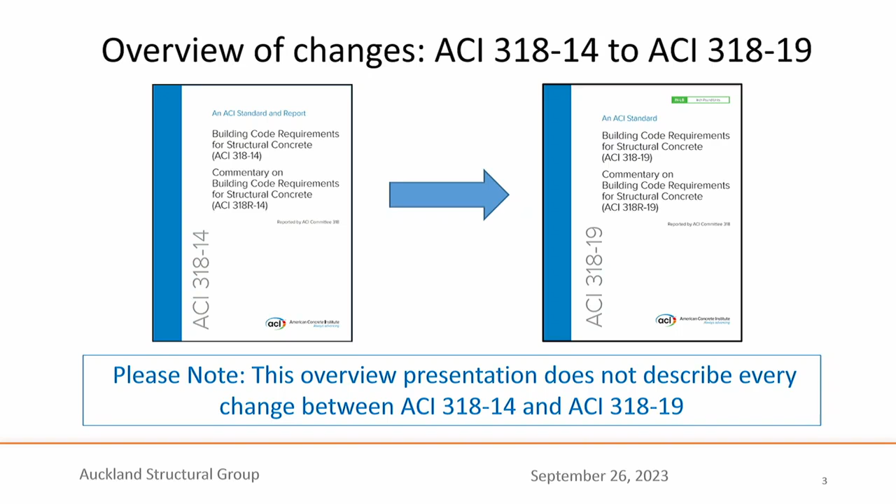Just a warning, if you are familiar with the 2014 edition, this presentation is not a complete introduction to all of the changes in the 2019 edition. I have to sort of put that disclaimer there.

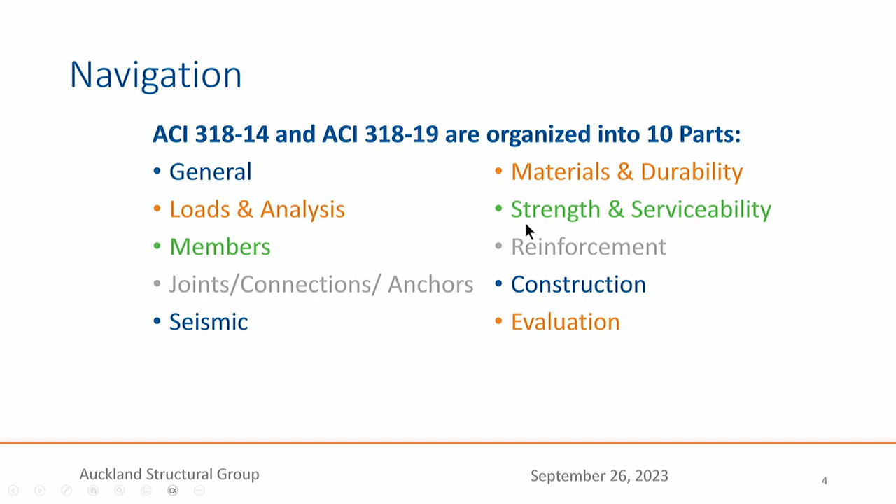With regard to the code in general, it is organized, currently since 2014, into 10 parts as shown here. I won't go through all of them, but you'll be particularly interested perhaps in the seismic part down here in the lower left. I will be talking about some key changes and trends in most of these sections as we go through.

All right, first, existing structures. Very often we have to evaluate existing structures for their strength, their capacity, and sometimes for seismic capabilities or seismic resistance.

This code is for new design, but there is a provision that says if you want to use this code to design elements as part of a retrofit, it's perfectly valid and is permitted. The commentary to that statement points the reader to another document, actually another building code called ACI 562, which is the official code for evaluation and repair of existing buildings. I just want to caution that is not seismic evaluation and upgrading of existing buildings. It's all things non-seismic, although it does point to some other places for seismic. So this is how we deal with existing buildings.

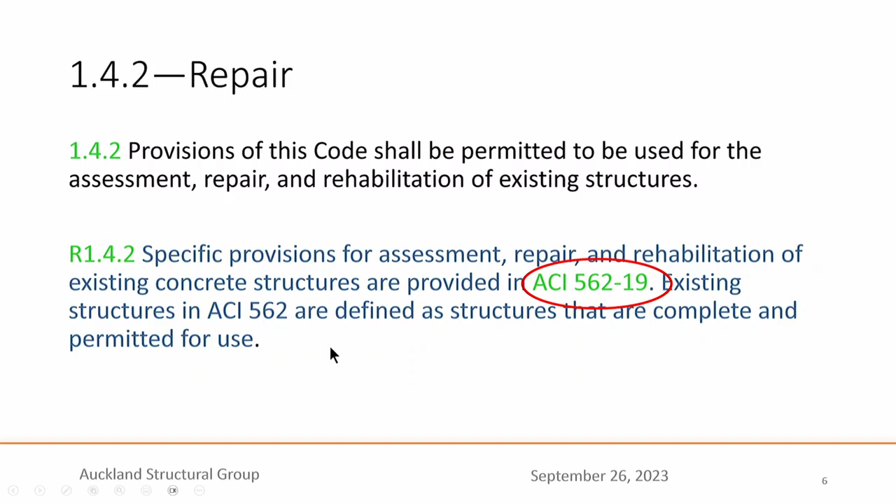But I want to also point out there's a chapter 27 - I believe it's the very last chapter of the code. This chapter is titled Strength Evaluation of Existing Structures, and you might think, aha, that's what I need to know if I have an existing structure and there's a change of occupancy and I need to design, say, or check for higher loads in the building. What it really applies to is new construction where there's some doubt about the strength - perhaps concrete test strengths came in low, or there was an error in construction, or for some other reason the building is new but needs to be evaluated. So we as engineers understand very well how to approach an existing structure that may have deficiencies and analytically evaluate its strength, taking into account those deficiencies.

There's another approach, which is load testing. This isn't used very often in the U.S., but when it is used, it's a very helpful and definitive proof of the capacity of a building. There are two procedures available for testing the strength of a new building. Let's imagine we're testing a two-way concrete floor slab.

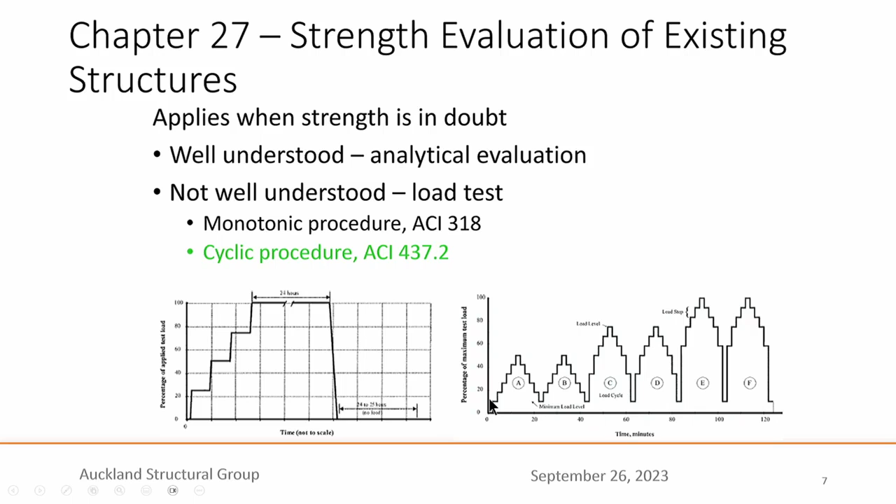There is another method, a cyclic procedure, which is in a different ACI document, ACI 437.2, and the scale here is on the order of 2 hours. It's a cyclic load, unload, load, unload, higher amplitude load, unload, and so on. This, of course, is a much faster and more efficient way to test the capacity of a new structure. So just letting you know about those two approaches.

Let's get into specific types of concrete members.

For one-way bending, one-way slabs, the ACI Code has structural integrity reinforcement requirements. These are minimal reinforcement required to be continuous through an element, whether it's a beam or slab, developed at each end. It's just a minimal, notional amount of reinforcement to help forestall progressive or disproportionate collapse. It does not take the place of a progressive collapse analysis—just a minimum amount of reinforcement to help stop a sequential collapse.

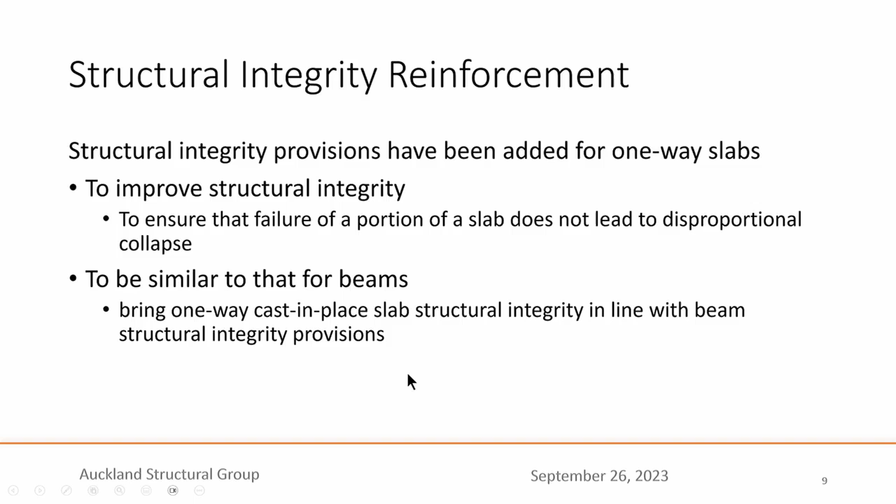There are new provisions now for integrity reinforcement for one-way slabs, very similar to the requirements for beams. I won't go into the details, but it's a simple check and a zero or low cost detail, because the bars you need are probably already in the design.

Moving on to two-way slabs: since time began, we've had two approximate methods in the code, introduced in pre-computer-based analysis days. One is the direct design method, the other is the equivalent frame method. These are for two-way slab systems—two-dimensional, approximate, prescriptive methods. We've found they're very rarely used any longer, but they're still valid—there's nothing wrong with them, just approximate and conservative.

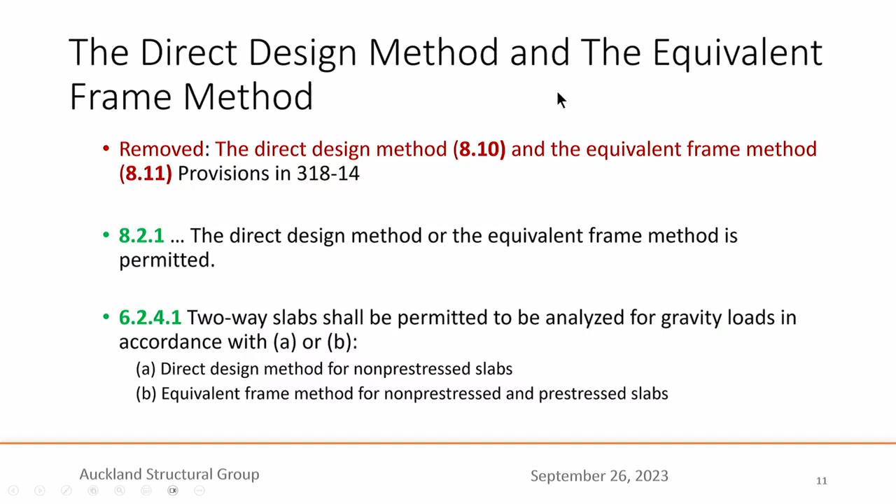So we removed them from the code, but put in a statement that those methods—either the direct design method or the equivalent frame method—are still valid to use. You just have to look back to an earlier version of the code. We're just saving some trees by not printing as many provisions.

Here's an interesting one about openings near columns in two-way concrete slabs. Previously, up until 2019, the rule was that if there was an opening near columns or near slab edges within 10 times the overall thickness of the slab—H being the total slab thickness—you needed to reduce the effective perimeter for punching shear, since those openings would affect punching shear strength.

That number was 4H and is now 10H—sorry, was 10H and is now 4H. So these openings can exist a fairly nominal distance from the face of the column, and you don't necessarily have to check for their effect on punching shear—you can if you like, but you aren't required to. Kind of an interesting liberalization of the code.

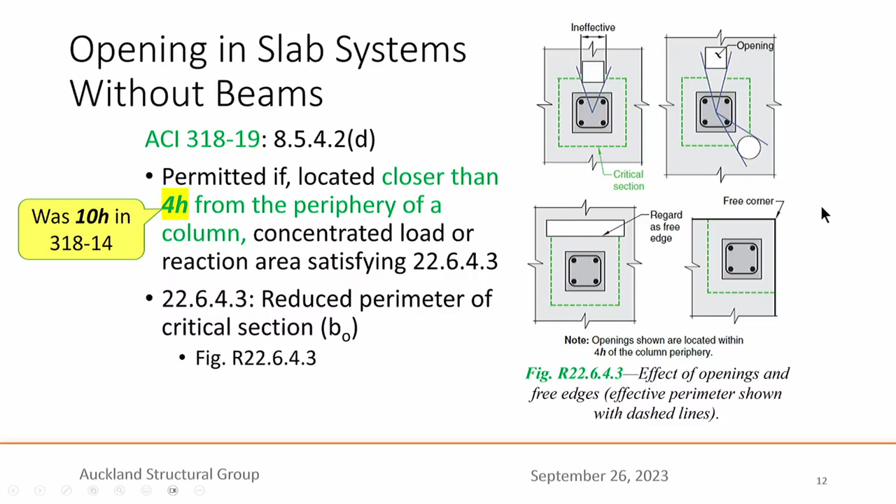Another new provision related to two-way slabs: in the United States it's actually quite common to have two stories of concrete structure starting at the ground level, then above that five or six stories of light wood frame construction. That concrete portion is called the podium, and all the wood shear walls in this five-story wood building bear on this podium slab.

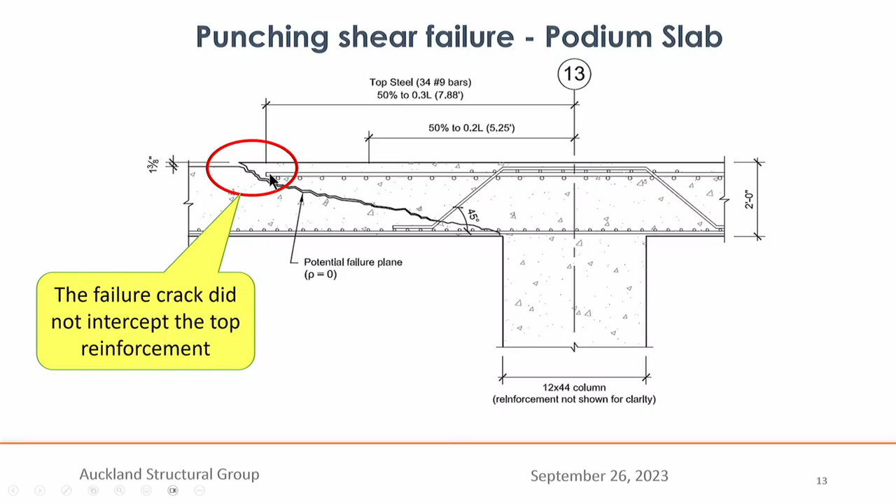It's been discovered that if the podium slab is very thick—in this case a slab thickness of 2 feet, about 60 centimeters, or greater—the punching shear crack may extend past the end of the top bars. That's because there's enough distance and thickness to propagate out past the ends of those bars. So we've increased the length of those top bars for very thick slabs, as shown in this slide.

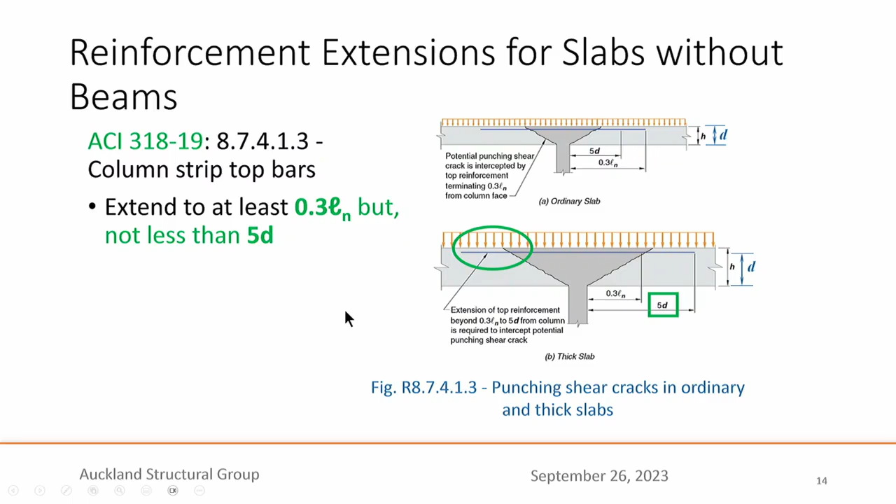On top is the provision for a normal or thinnish slab, say 30 centimeters thick. Once slabs get quite thick, there's now a secondary check to extend the bars further, so they extend past the path of propagation of that punching shear failure surface through the top of the slab, with the bars crossing that crack. We recognized a condition where something wasn't quite right, and we fixed it.

Post-tensioning construction is very common in some parts of the United States—for instance, where I live, the Pacific Northwest—but in other areas it's very uncommon. So the use of post-tensioning varies quite a lot across the country.

One update was to simplify things: when you have a post-tensioned slab, you're also required to provide some non-post-tensioned deformed reinforcement. We changed the maximum spacing requirements for that non-post-tension reinforcement so it matches non-post-tensioned slabs—the same for both types. That maximum spacing is either 3 times the total thickness of the slab or 18 inches, about 450 millimeters.

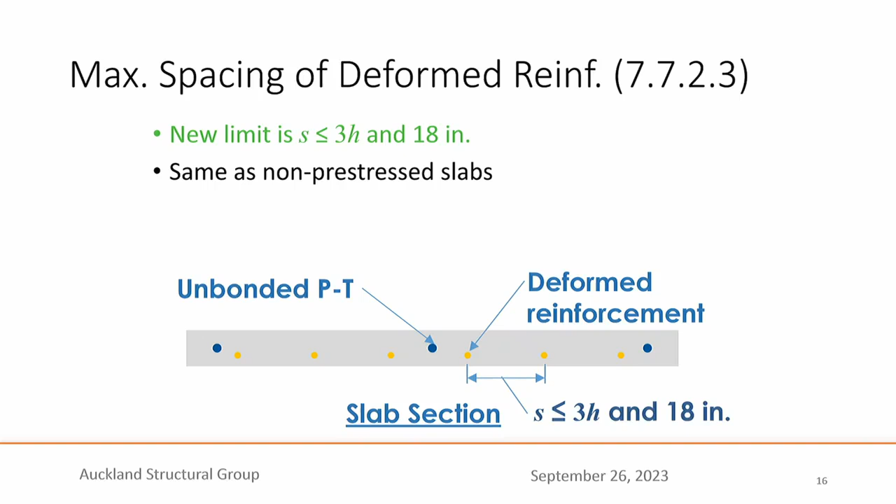Also related to PT, some forms of post-tensioning construction for slabs have groups of tendons very close to each other, called banded tendons. There may be as many as 8 or 10 tendons close together, with the anchorage forces very close together in a line along the edge of the slab. To prevent bursting of the slab under these high localized pressures, we require backup bars and hairpin bars, which help resist the high tensile bursting stresses that occur just behind the anchor. That's a new provision related to this configuration of reinforcement.

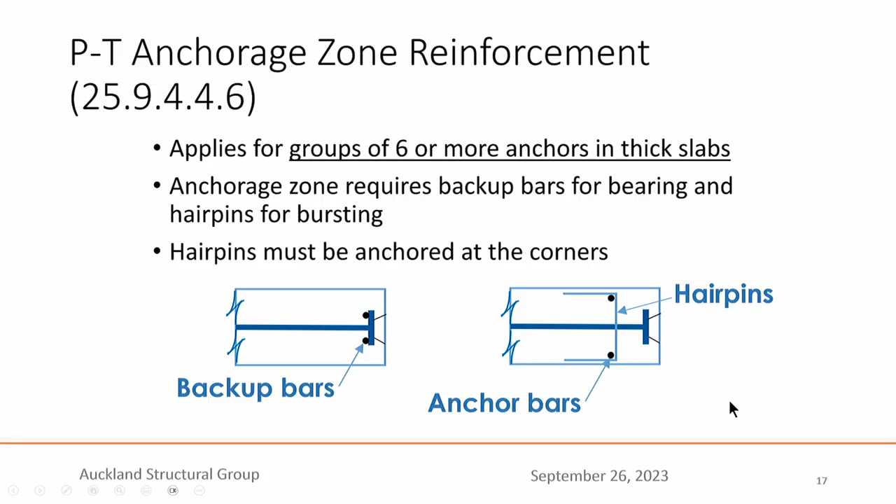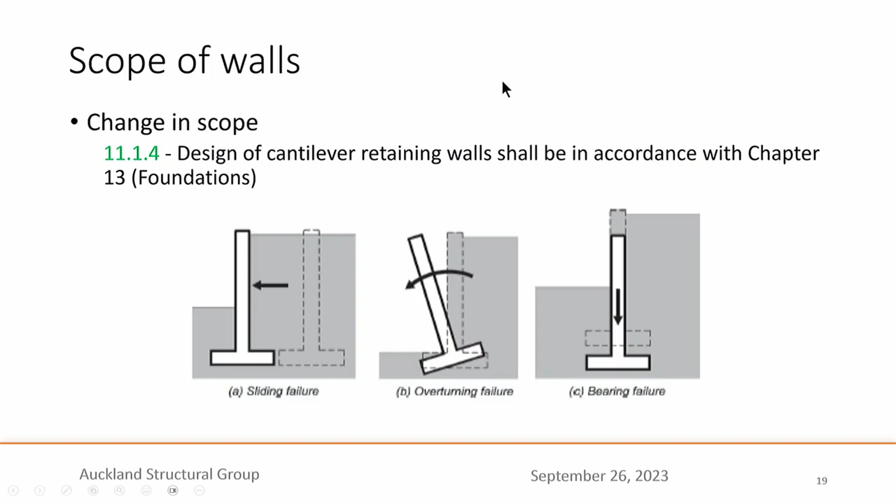Moving on now to a new type of member: walls. We've had a change in philosophy related to cantilever retaining walls, in that we now treat them not as walls included in chapter 11, but as foundation elements included in chapter 13 on foundations. We reasoned that cantilever retaining walls are really closer to foundation elements than freestanding concrete walls, partly because the lateral loads on the stem of the wall are the dominant load that controls design.

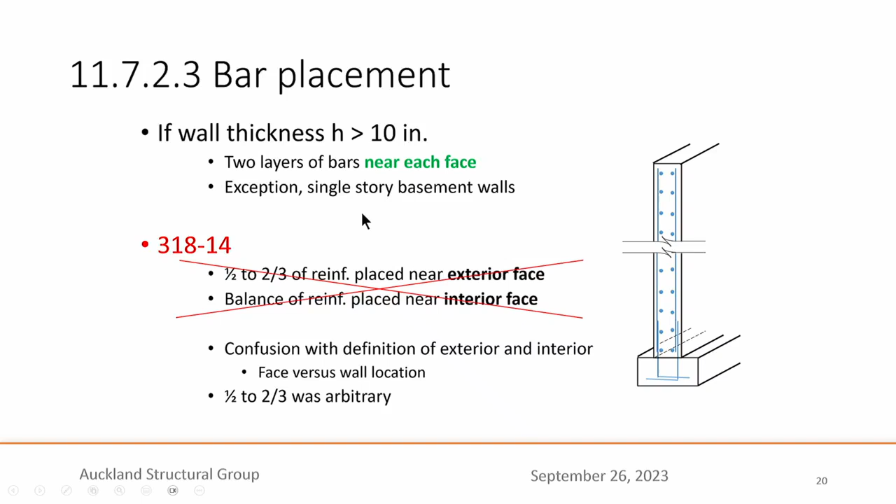Another detail that helps clarify placement of reinforcement: prior to 2019, we had some obscure, difficult to understand provisions about the number of layers required of vertical and horizontal reinforcement in a wall. If the wall was greater than 10 inches, or about 250 millimeters thick, you needed, and still need, 2 layers of reinforcement, one near each face. We had confusing rules like half needs to go here, two-thirds over here, and we got rid of all that. We just said you need 2 layers of bars, and typically designers will put half in one face and half in the other. We do have an exception for single-story basement walls, used a lot in commercial and residential construction, where this requirement is less important. So simplification and clarification there.

Foundations are, of course, a major use of reinforced concrete, and we are constantly updating those provisions in the 318 code. We added design provisions for cantilever retaining walls, now in chapter 13. We've also done a lot of work on provisions related to deep foundation design, where deep foundations include driven piles, cast piles, auger cast piles, and various deep foundation elements used particularly in poor soil conditions. We've also added provisions related to minimum concrete strength for both shallow and deep foundations, and cover, meaning the concrete cover over reinforcement to control corrosion.

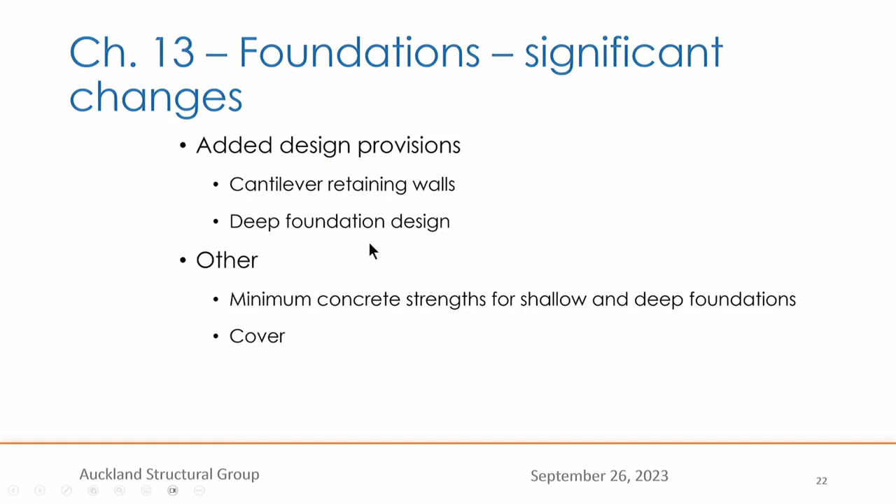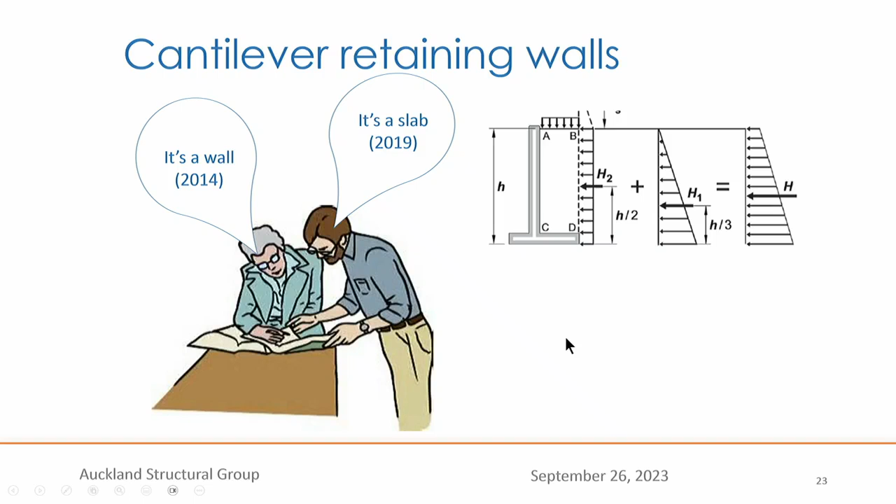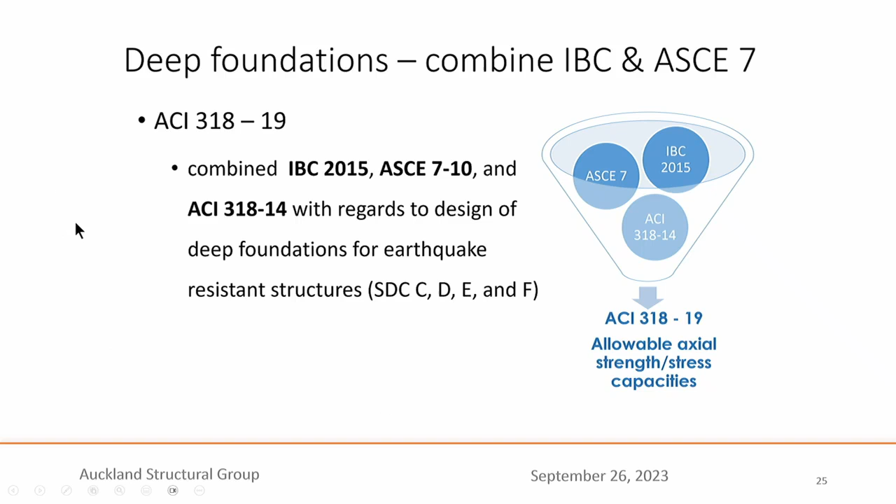Here's a big important change. In the US, for reasons I don't understand, we've had deep foundation provisions for concrete type deep foundations spread across 3 different design codes: ASCE 7, which is a loads code, not a concrete design code; the International Building Code, the master code for the US that refers to material codes like the ACI code, the wood code, masonry code, and so on; but there were provisions for deep concrete foundations in the International Building Code, which shouldn't be there. All of them should be in the ACI code. So we are gradually bringing all of those provisions into ACI 318. In 2019, we succeeded in bringing many of them out of those other codes into ACI 318, and we hope to complete that process in 318-25. We'll see.

Anchorage to concrete, everyone's favorite subject. We actually reorganized this chapter so that it mimicked more closely the organization of the other member type chapters.

And we also added post-installed screw anchors, the type you see on the left. I think those are very useful in some situations.

And also attachment with shear lugs, where shear lugs are projections on the bottom of a steel plate intended to provide additional shear capacity at the base of a steel column or other attached steel element. However, there have never been any provisions describing the capacity of those shear lugs and the failure surface in shear for this lug projecting into the concrete. So those are in the code now.

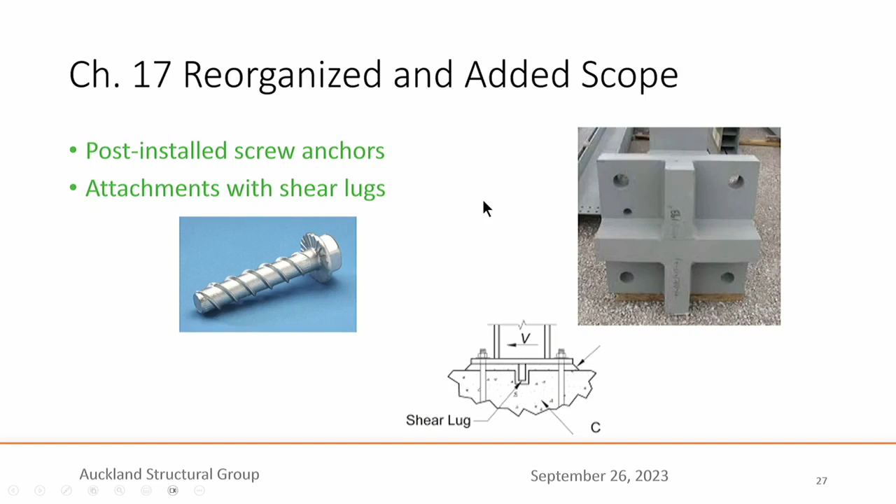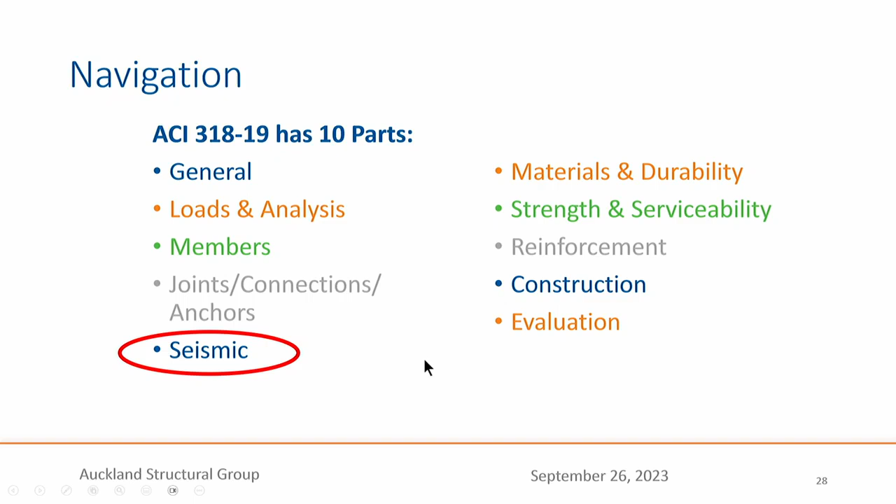So now let's talk about seismic, really important subject both in the US and New Zealand. I want to point out there were quite a few changes to the seismic provisions between 2014 and the current 2019 edition. I wrote two articles in the magazine Concrete International with S.K. Ghosh summarizing every change in great detail, except for the deep foundation ones, because that would be a whole other two articles. If you look online at Concrete International, I believe you can find those for free. If you want to know what the current seismic provisions are in the 2019 ACI Code, that would be a good place to get a very condensed tour through those.

Another big change in seismic was we added what we call higher strength reinforcement grades to the code for seismic force resisting systems. This table here, which is very small, I've highlighted with green boxes the updates that are included to allow higher strength reinforcement. And what do I mean by higher strength reinforcement?

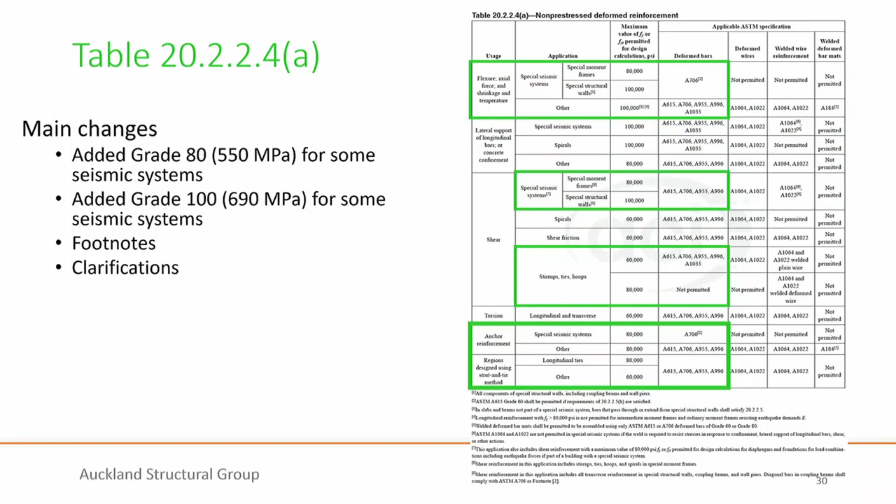We've introduced the possibility of using 550 and 690 megapascal strengths for certain elements of certain seismic systems. You have to read through this table in great detail, and if you get a copy of these slides, you can see those. But this table, 20.2.2.4a, is very useful because it covers all applications of reinforced concrete and what grades of steel reinforcement are permitted for each of those applications. So it is a complicated table, but it is a complete picture of reinforcement grades permitted under the ACI Code.

All right, now let's talk about special seismic systems. We have what we call special moment frames and special shear walls. Special means they are detailed for the best possible seismic performance. There are also intermediate systems and ordinary systems of various defined standards for different types of lateral force resisting systems, which are deemed ordinary, intermediate, and special. I'll just describe the special ones here.

This is where these higher grades of reinforcement are anticipated to be used. The only changes really relate to the spacing of shear reinforcement or confining reinforcement for the higher grades, because presumably you are either using the same size or a smaller size bar. You're allowing a higher stress because they're a higher grade longitudinally. Therefore, their tendency to buckle laterally is higher than for the lower grades, so the lateral support of those bars needs to be closer together. Therefore, the hoop or tie spacing for the higher grades is reduced compared to the lower grades. So we just see that here.

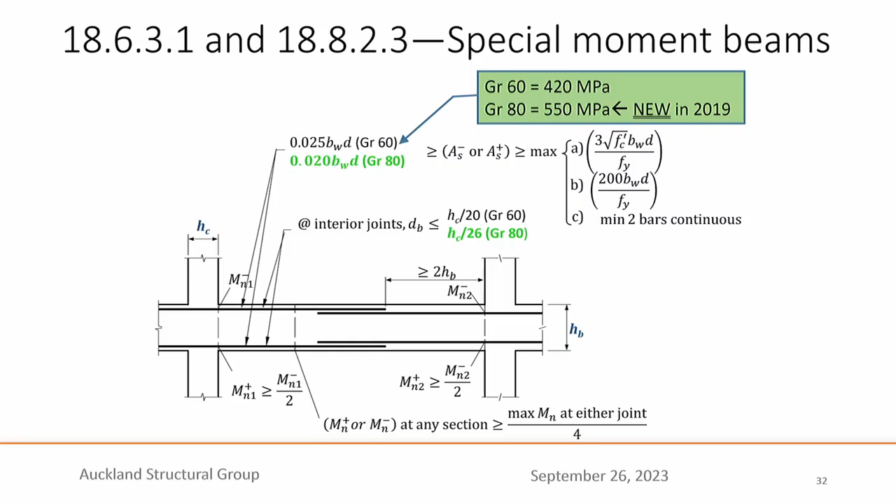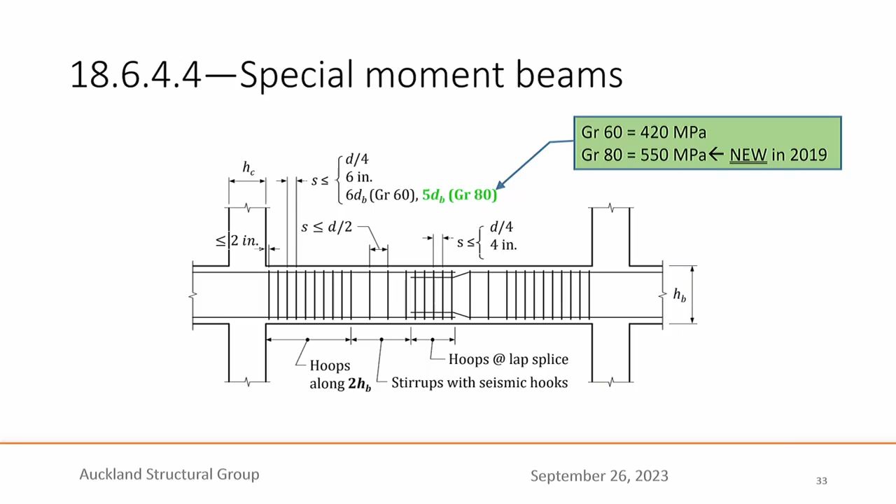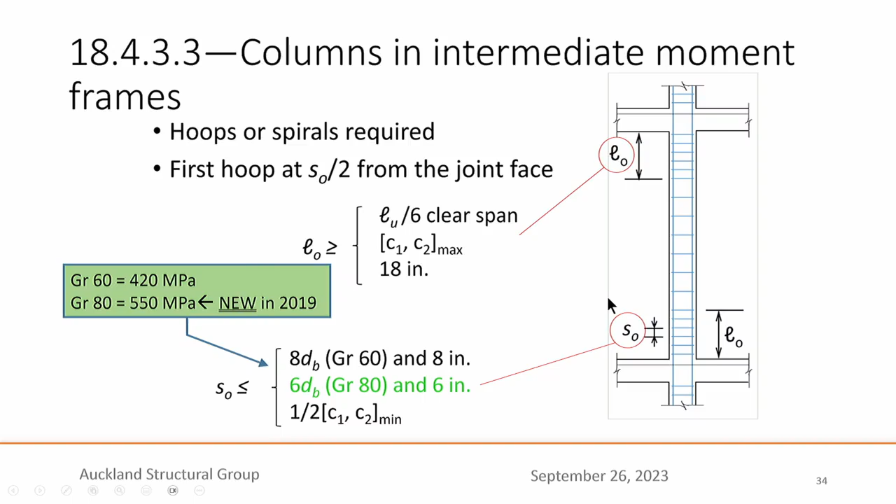Whatever's in green here is a new, slightly closer spacing for one of the higher grades, for 550 megapascal, in special moment frame beams. I won't go through these in detail, but also the stirrup spacing in special moment frame beams has a slightly different requirement for 550 megapascal bars. Columns in intermediate moment frames have a change in spacing over these plastic hinge regions for the higher grade reinforcement. Columns in special moment frames have more reduction in spacing for the higher grades of reinforcement.

Okay, now special structural walls. Again, one of the things that we allow now in special structural walls is higher strength or grades of reinforcement. These are six of the major changes related to special structural walls or shear walls for resisting seismic loads.

I will go through each of these very briefly: the cutoff or termination of longitudinal bars in special boundary elements, illustrated here as the highly reinforced and confined regions at the edges of walls. We have an update in the required minimum reinforcement ratio at the ends of walls. Shear demand for certain walls has increased very significantly. We have a drift capacity check, which is essentially a minimum wall thickness check in disguise. And then we have new provisions for detailing in special boundary elements, which are starting to look a lot like the provisions that you use here.

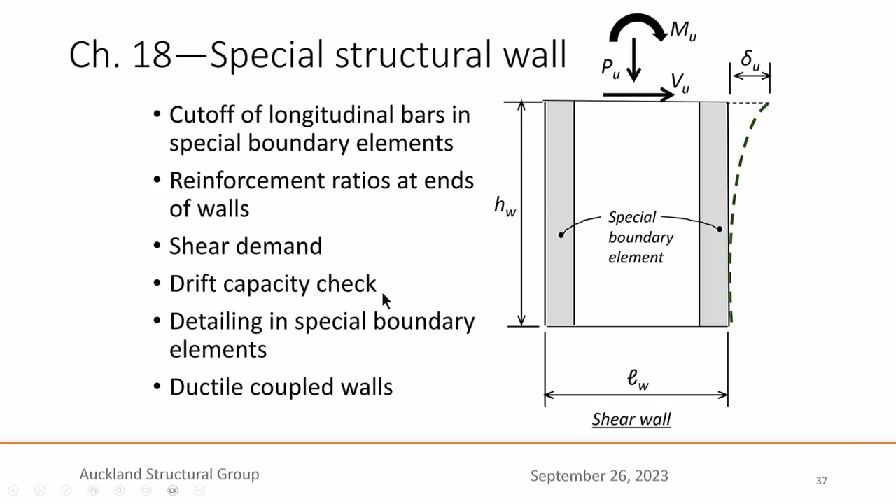And then we have a new old structural system, ductile coupled walls. I'll explain a little bit more about that when we get to it.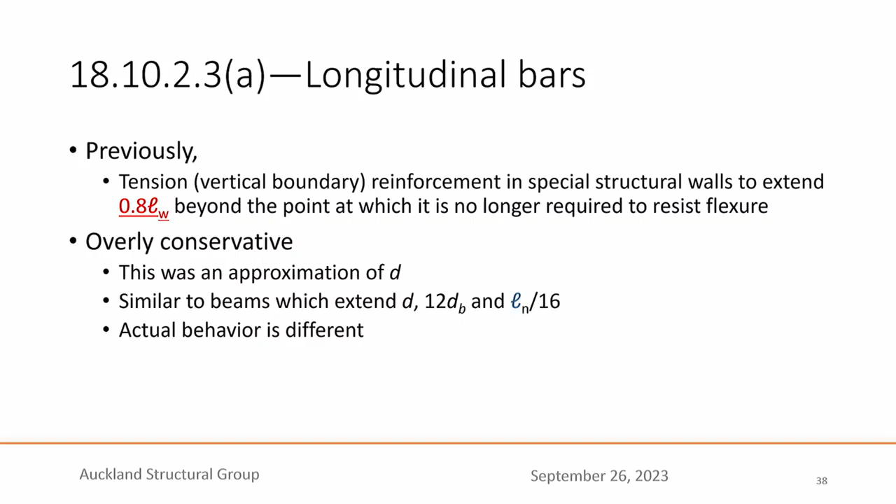So these longitudinal bars running up the main flexural reinforcement in the ends of walls, we used to require that they be continued past the point at which they were no longer needed by 80% of the length of the wall. So if you had a very long wall, you could be required to extend the vertical longitudinal bars a quite long distance, 2 or even 3 stories, which doesn't really make any sense. It turns out that 0.8 provision came from a kind of crude beam analogy for walls that is not actually correct. So we've changed that to at least 12 feet, which is about not quite 4 meters.

At least 12 feet, but not more than 1 bar development length above the next floor. So gone are the days when these bars have to be sticking up in the air 2 or 3 stories. At most, they need to be sticking up beyond the next story 1 bar tension development length. So that has improved constructability quite a lot.

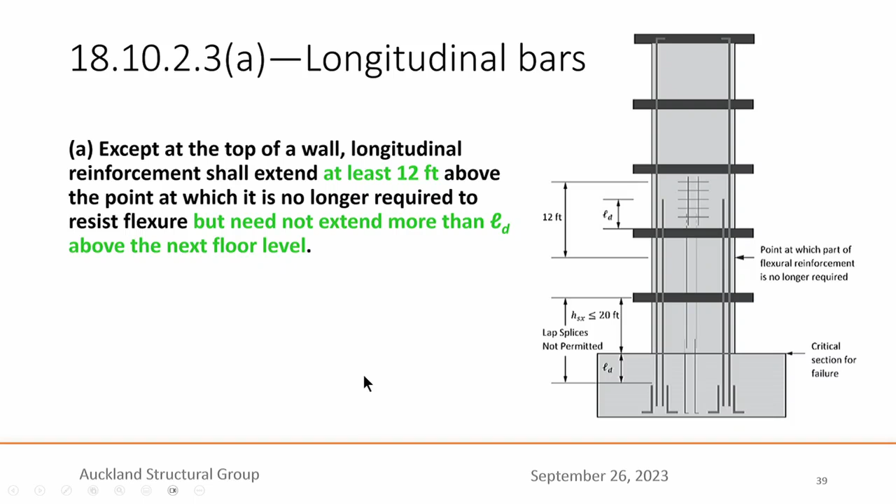This is for special concrete shear walls. I could go into the reasons for this, but it takes a bit to explain. However, the alternative here would be either to not do any splicing in that region or use mechanically coupled bars. Contractors don't like that because they're expensive. They do reduce congestion, though, reinforcement congestion, so that's an advantage. But this is new. It's causing a little consternation amongst contractors, especially, but we think it's a good improvement.

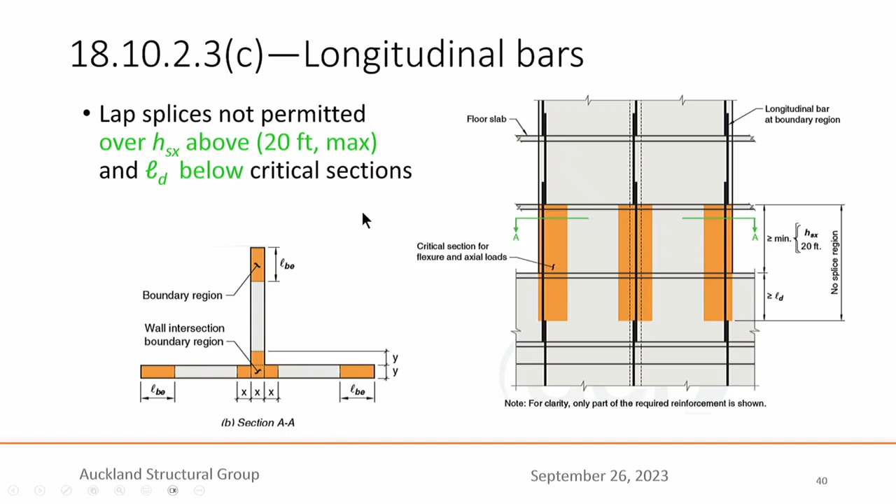Now comes a provision which was adopted in 2019 and was originated by Rick Henry and Ken Elwood, who have both contributed to the ACI 318 Seismic Committee, and we appreciate their contributions.

Based on failures observed in Chile and New Zealand, if a wall does not have enough area of reinforcement near its ends, what happens is when the wall cracks in tension, only a few cracks, one or maybe two, develop, which is not a good thing because that concentrates all of the strain, the plastic or yielded strain, in just one or two locations.

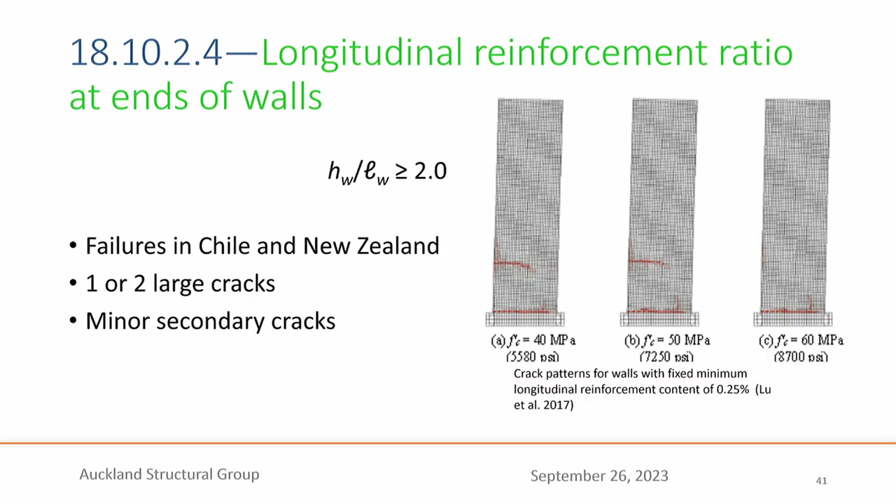And you don't get the benefit of spreading out that inelastic action through a number of cracks. These are examples, I believe, in the code, these illustrations. But if we provide a minimum, shown here by rho equals 6 square root of F prime C over Fy - those are inch-pound units, so be careful - look at the metric version of the code to find the correct version for New Zealand.

We end up with many well-distributed cracks, which is really the ideal way to utilize yielding of reinforcement to dissipate energy in a structure as it undergoes inelastic earthquake displacement. And so that is a new requirement. We have found that it doesn't govern very often with the way walls are designed in high seismic regions in the US, but occasionally it does. So it's a good thing that it's in there.

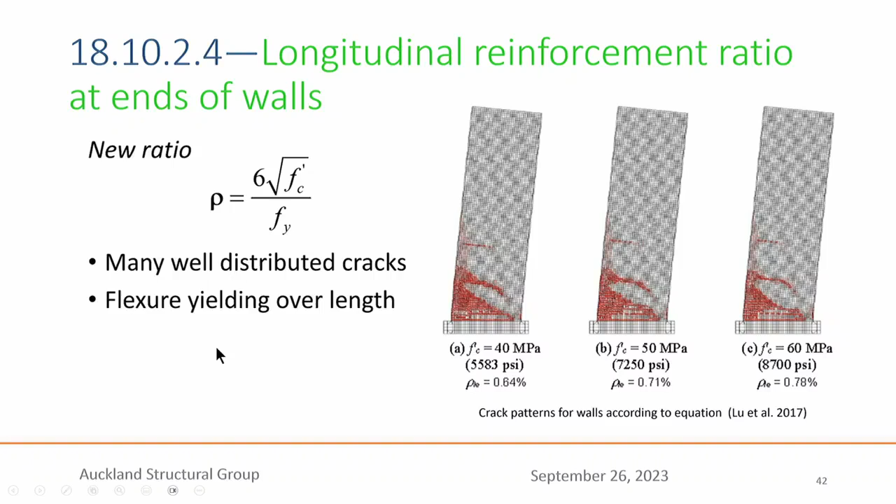Here's maybe the biggest change in the US code for 2019. It is the so-called amplification of shear. This is the design shear forces for walls. It affects mainly walls that are tall and narrow. It's a phenomenon we have known about for a long time, by researchers in both New Zealand and the US, but it has never found its way into the code.

The phenomenon we're referring to here is an increase in the shear demand on reinforced concrete walls due to two factors. One is overstrength of the materials, so overstrength of the flexural reinforcement above what we assume in design. Maybe you have a 20% overage in yield strength, but you designed for the specified yield strength. That additional moment capacity leads to higher shear. So there's a factor greater than one related to the shear demand on a wall caused by overstrength of materials, both concrete and steel.

The second factor is higher mode effects. We typically visualize concrete shear walls, especially in tall buildings, as being swaying elements. We may occasionally think about a second vibration mode. But what we don't usually think about is the contributions of higher modes - third, fourth, fifth, sixth, seventh. Those add up to a fairly significant increase in the shear demand, those higher mode effects on the shear walls.

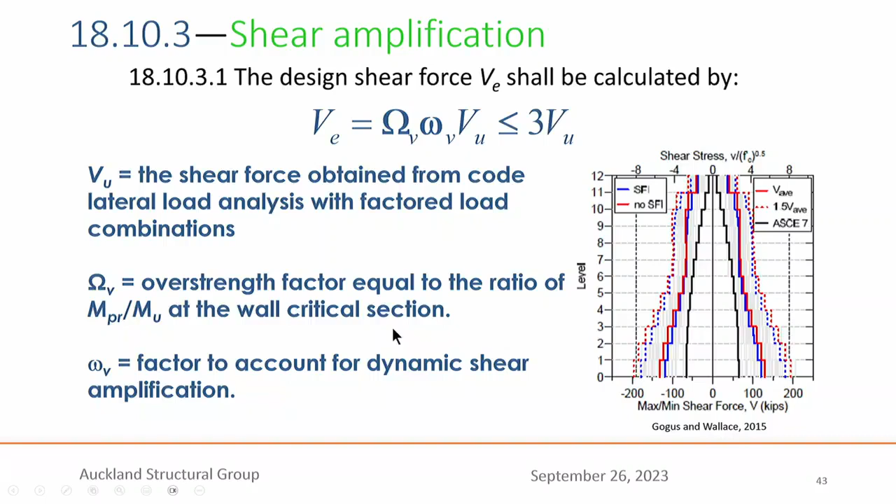So these two factors are taken into account in terms of big omega sub v and little omega sub v. They are multipliers on the shear V sub u that you would get out of your normal analysis. I should point out, if you do a nonlinear response history analysis of a tall building, say a concrete core wall system, you have effectively satisfied this already. This is to account for situations where a designer is not doing that sort of analysis that would bring up these effects as part of the analysis. But we want to make sure that these increases are included in all designs. So we have these two factors.

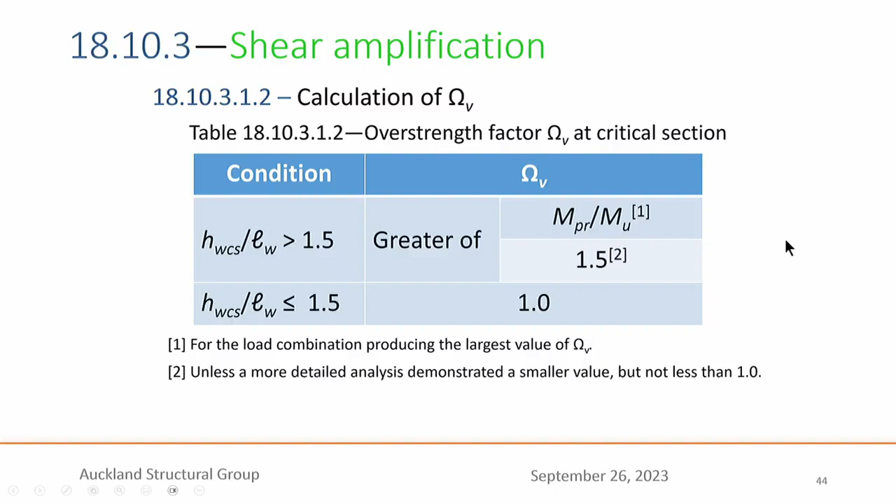What are their values? They're shown here in this table. Big omega sub v typically has a value of somewhere between 1 and 1.5. It could be a little higher. It depends on the aspect ratio of the wall, the height versus the length of the wall. There's some conditions on that. And then little omega sub v, the higher mode amplification, is a function of the number of stories in the structure, as shown here, and the aspect ratio of the wall, as shown on the left. I will point out that this n sub s value is calculated based on a building height in feet.

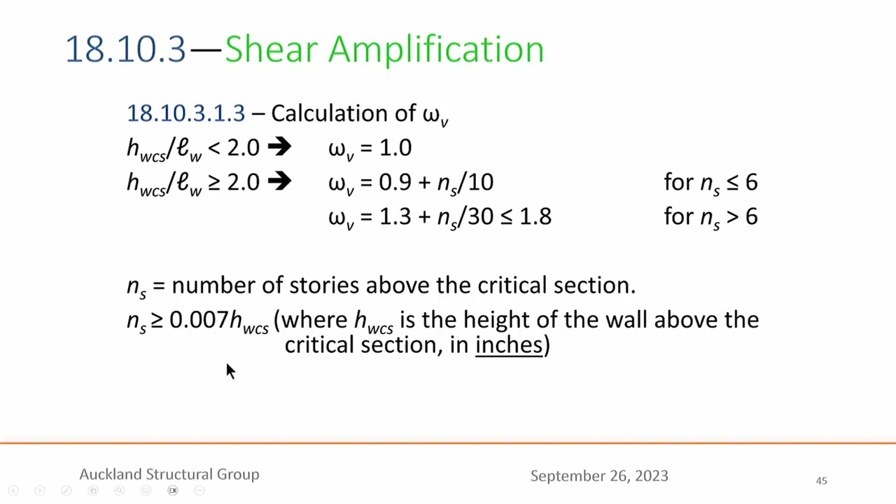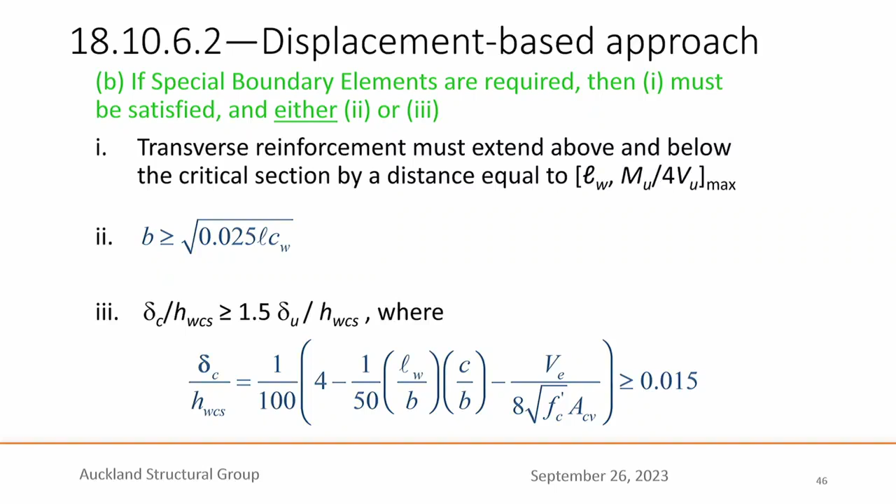So please use the correct formula if you're doing it for metric units. I mentioned that there's effectively a minimum wall thickness requirement that has been introduced. That is in this section, 1810.6.2. You can do it the simple way or the hard way. The hard way is option 3, which is difficult to use because it requires an iterative solution, which can be quite cumbersome. You can take the shortcut approach, which is direct, in that the thickness of the wall, B, has to be greater than 0.025 times the length of the wall times the depth of the neutral axis in the wall, the distance from the compression face. So that's there. We find actually in US practice this very rarely governs, but occasionally it does govern. And it's important to have a minimum thickness of wall to forestall lateral buckling of a wall that's too thin. If you have a very slender wall, when it's loaded, its edge is loaded to compression, it can buckle laterally.

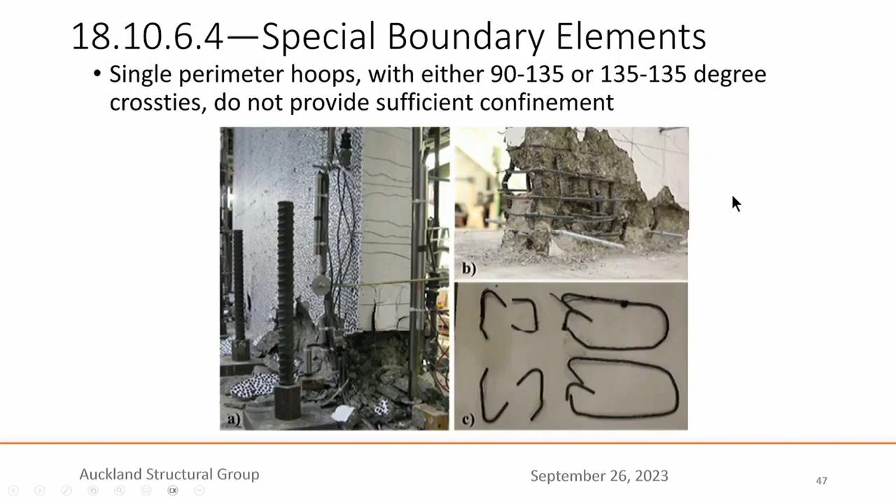Now we have new and improved detailing provisions for the confining zones at the ends of walls called the special boundary elements. And these are starting to look a lot like what you use here. We have now requirements for overlapping closed hoops within these boundary regions at the ends of walls. We also have requirements for 135-degree hooks at each end of cross ties, and a requirement that every pair of bars within the boundary zone have a cross tie, including through the length this way.

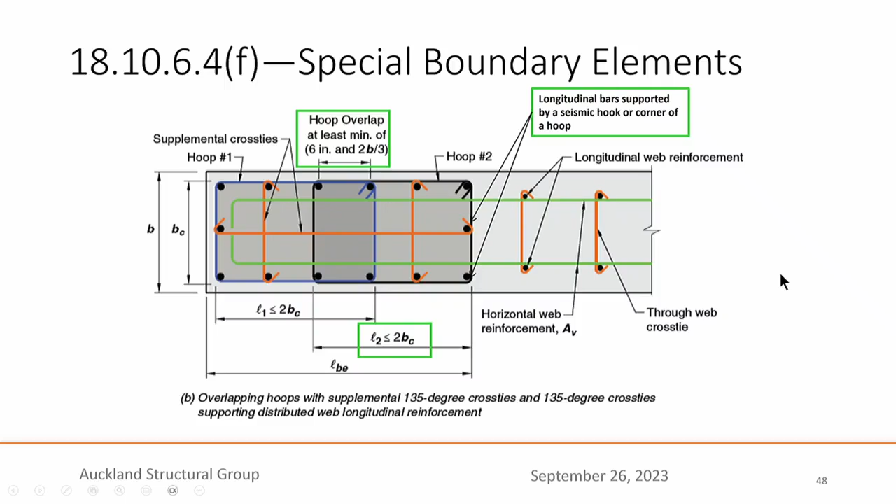In addition, we have a requirement that 135-degree bends are required on all bars, cross ties outside the special boundary zone, which is shown by this length L sub BE. So this is a big change. We previously could use cross ties with a 90-degree hook on one end, 135 on the other. Contractors like these because you can stick them through, hook them, and jam them home, and they're easy to install. This is much more challenging, so we're dealing with a lot of grumbling about that.

Okay, and I already pointed out this slide relates to these cross ties in what we call the field of the wall outside the special boundary element region.

We have introduced a new type of wall, which is an old type of wall, and we've given it a name, ductile coupled walls. There are, I believe, millions of these walls constructed around the world. You can see they're very familiar. It's a solid wall and another solid wall with connecting beams. Those beams couple the two walls and make them act together. In the extreme, they would act as one single wide wall. If those coupling beams are very weak or flexible, the behavior would approach that of two independent walls.

However, this type of wall has never been explicitly defined in ACI 318, and that is important because until that definition exists, the other code that is dominant in the U.S. for loads and structural system definitions, ASCE 7, will not specify seismic parameters related to designing this kind of wall. Somehow we have gotten away or gotten around having those parameters for decades. Finally, we define this ductile coupled wall.

The definition is given here. I won't go into it. It has to do with some geometric constraints on these elements. And if you meet those requirements, you have a ductile coupled wall, and then you have seismic design coefficients or parameters in ASCE 7 specifically for ductile coupled walls, which are actually more generous than the values we had before we defined ductile coupled walls.

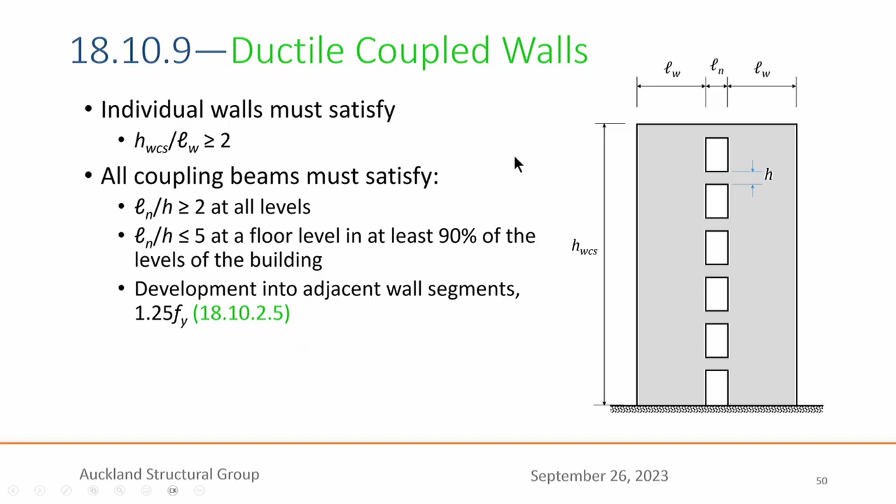So that's the reasoning for doing this. Okay, so I have talked about some general trends with the 2019 code.

I want to just very briefly go through some things that we're working on for 2025, just for your interest. We are writing a new appendix for the code.

The code historically has had various appendices on different topics. Once an appendix goes in, very often it moves in to become its own chapter in the code in the next edition. In any case, we have written an Appendix N, which is for sustainability provisions.

This is not a chapter which specifies limits on global warming potential or other metrics for defining the sustainability of a concrete mixture or a concrete product. It simply says if you are going to define the global warming potential or the life cycle carbon load of a building, this is how you ought to do it. But we don't say what the limits are that you might have to meet.

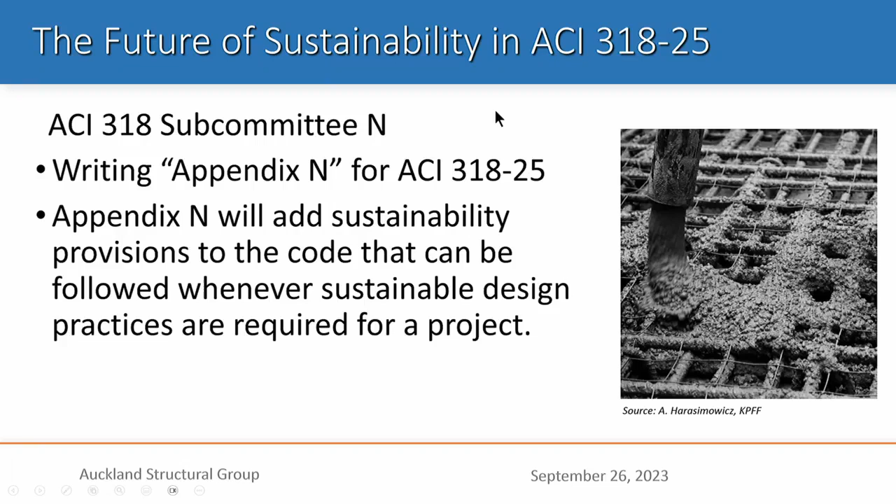We believe those are better determined by local governments, local jurisdictions, because they're highly location dependent, what's achievable and what's not achievable in terms of global warming potential for individual mixtures.

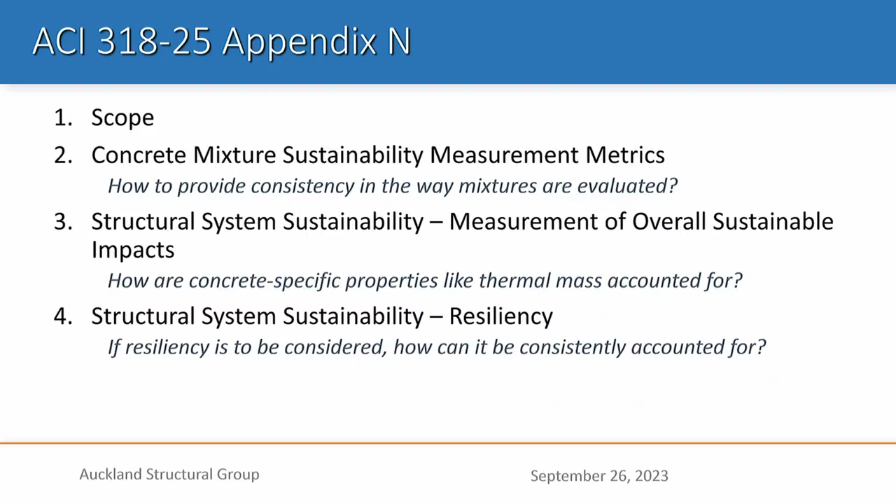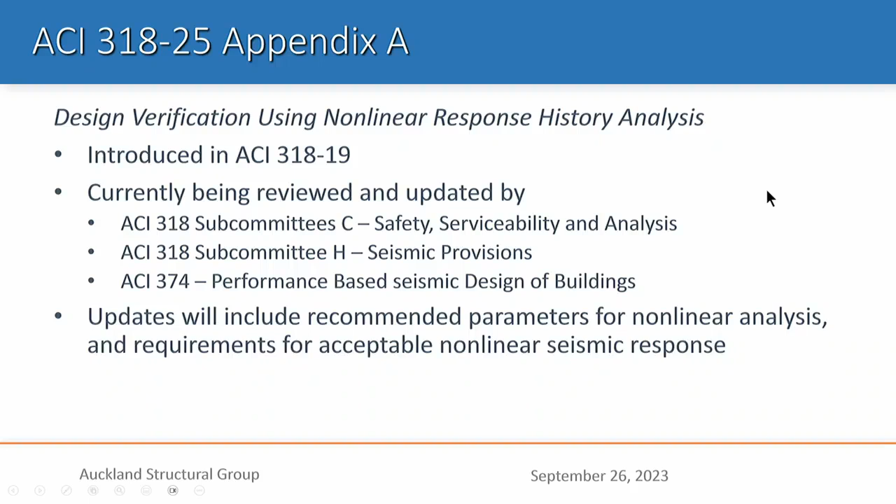We had to write this because another code started to write provisions for doing nonlinear response history analysis of concrete structures, and we wrote them a letter and said, no, you shouldn't do that, and we'll take care of it. So we did it. That is evolving. It will probably get more complete with each edition of the code.

Anchoring to concrete, we aren't changing too much, but we are exploring this question of if you have a reinforcing bar of a certain length and an equivalent anchor of a certain length, an adhesive anchor or a wedge anchor or whatever, why is there a difference in the way we treat the development of those two things?

And the other thing is, if you have a group of embedded bars and you have a group of closely spaced concrete anchors, why is there a difference in the capacity of that group, at least under the ACI 318 rules? And maybe there should be.

This subcommittee, Subcommittee R, is exploring that, and we'll have a few but important updates to the code regarding groups of bars and their development in tension.

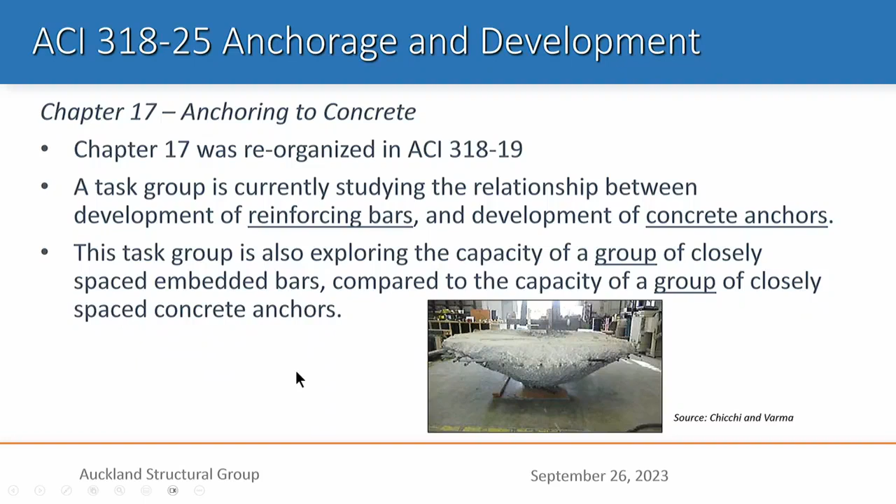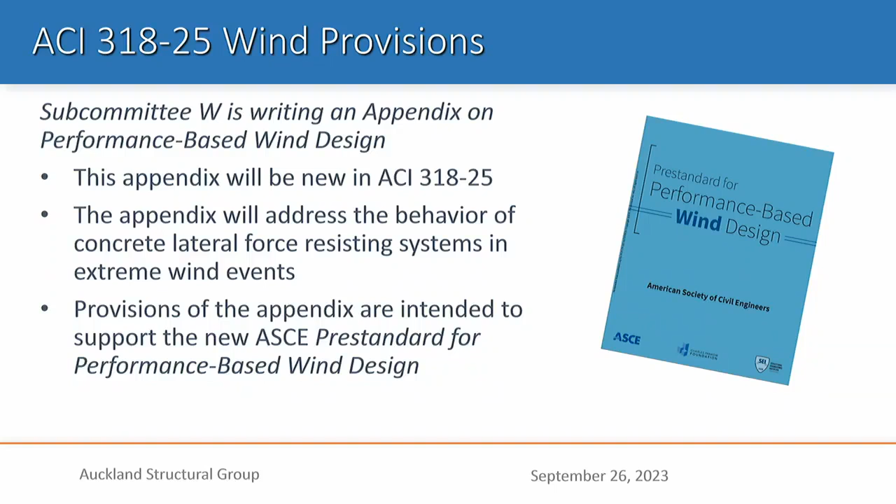We have a new appendix under development related to performance-based wind design. You're probably familiar with performance-based seismic design. In the US, there's emerging now a trend to do wind design, especially for tall buildings, using a performance-based approach. And so again, in response to other codes developing provisions on that kind of design, we're developing an appendix for performance-based wind design in ACI 318.

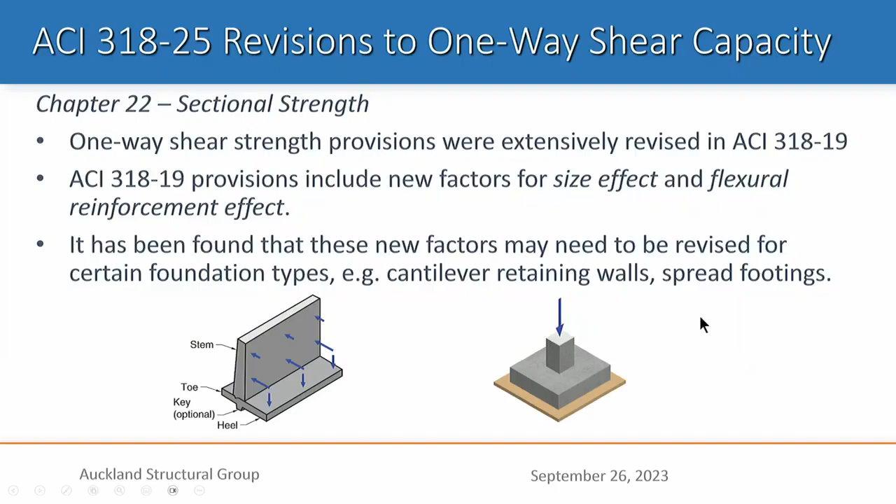Briefly related to precast and post-tension concrete, we used to treat those in one subcommittee. Now we're treating them in two subcommittees in ACI. In addition, ACI has authorized and initiated the development of two new separate concrete codes, one on precast structural concrete, 319, and the other on post-tension structural concrete, ACI 320.

Those are under development. I really don't know if they're going to finish them by 2025, but they are completely separate from ACI 318. Even though 318 contains provisions for precast and post-tension concrete design, these codes will go further into more details and so on. So the basics will still be in 318, but there will be these specialty codes that will provide more detailed guidance for more complicated situations.

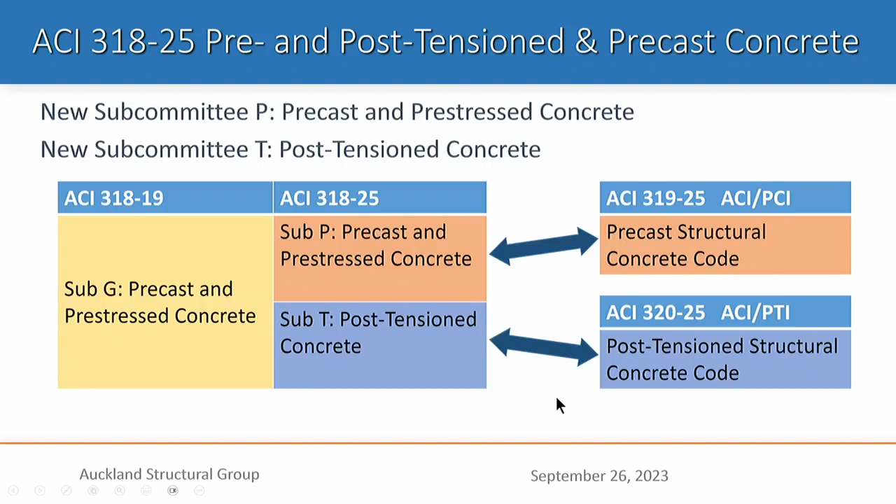So that's it. I talked about some changes and trends in the evolution between 2014 and 2019, the editions of ACI 318. And I just gave you a highlight of provisions that are being considered for 318-2025.